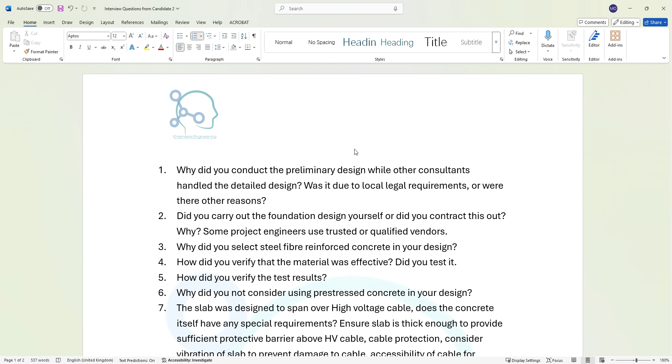Question 1: Why did you conduct the preliminary design while other consultants handled the detailed design? Was it due to local legal requirements, or were there other reasons? This question is asking why exactly did you perform that scope. Why didn't you do the whole scope? Why did you have to allocate some parts of the project to consultants?

Question 2: Did you carry out the foundation design yourself, or did you contract this out? Why?

It's important for you to note that some project engineers use trusted or qualified vendors. This is where we have examples of candidates acting more as project civil engineers or project mechanical engineers instead of technical engineers. Even though you are acting as a project civil engineer, you are still responsible for the project in terms of the technical know-how. So you need to know about the technical side of the project. Very important.

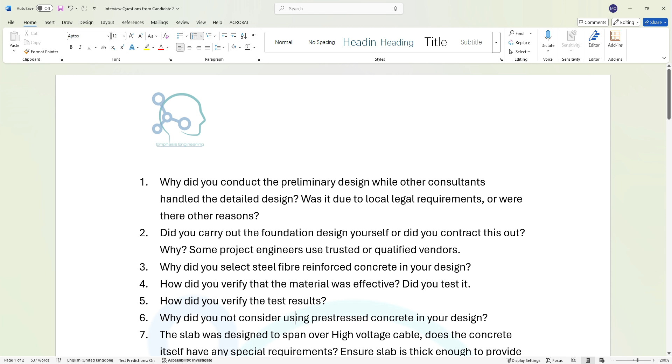Question 3: Why did you select steel fiber reinforced concrete in your design? Question 4: How did you verify that the material was effective? Did you test it? Question 5: How did you verify the test results?

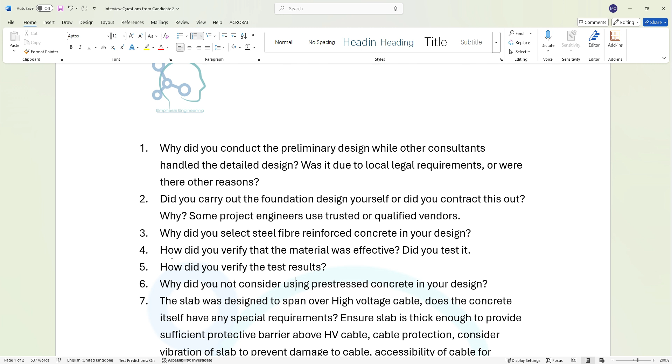Question 6: Why did you not consider using pre-stressed concrete in your design? It's not enough to tell us that you selected a particular component. You have to tell us why you did not select others. What was wrong with them?

Question 7, a specific question: the concrete slab was designed to span over high voltage cable. Does the concrete itself have any special requirements? What sort of characteristics would you expect for that concrete slab which was over a high voltage cable?

Things like ensuring that this concrete slab is thick enough to provide sufficient protective barrier above high voltage cable protection. Consider vibration that the concrete slab will be subjected to. You have to make sure that it is not subjected to vibration that will cause damage to the cable. Also, ensure that there is accessibility of the cable for inspection.

Question 8: Are there any specific additives selected? Did you use any additives for the concrete mix to improve the characteristics of the concrete?

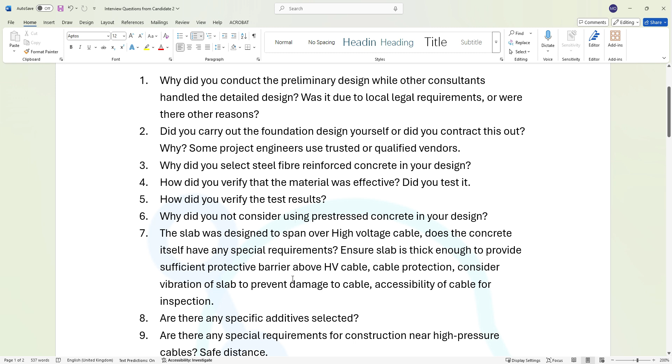Question 9: Are there any special requirements for construction near high pressure cables? For instance, you have to consider safe distance because of the risk of high pressure exposure.

Question 10: Why did you use prefabricated materials? Advantages of fabricating materials before sending them to the site are speed and efficiency, reduced on-site labor. It is also sustainable.

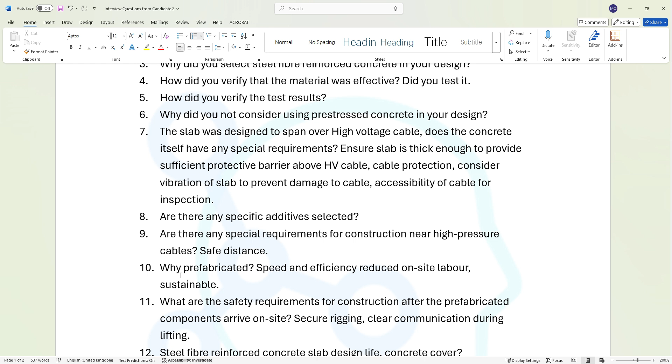Question 11: What are the safety requirements for construction after the prefabricated components arrive on site? Things to consider when bringing in these large prefabricated materials on site are secure rigging, clear communication during lifting operations. Question 12: Steel fiber reinforced concrete slab design life - talk about that and concrete cover.

Talk about design life and concrete cover. Question 13: Did you conduct any ground investigation works? Question 14: How can you verify the accuracy and correctness of the data provided by the ground investigation works?

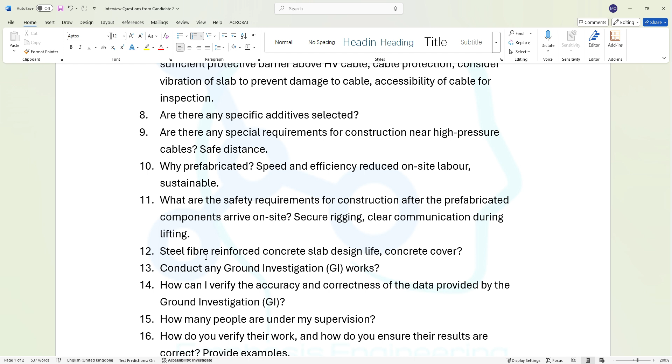Question 15: How many people are under your supervision? Question 16: How do you verify their work and how do you ensure that their results are correct? Provide examples.

As a team lead or a technical lead, it is not enough for you to assign tasks to team members. You have to ensure first that they are competent, they are proficient, and also ensure that you verify the accuracy, the method.

Question 17: What software did you use during project scheduling? Question 18: How do you determine what the critical path is? Question 19: What is the float of a project? For question 18, they're asking for the critical path of a project.

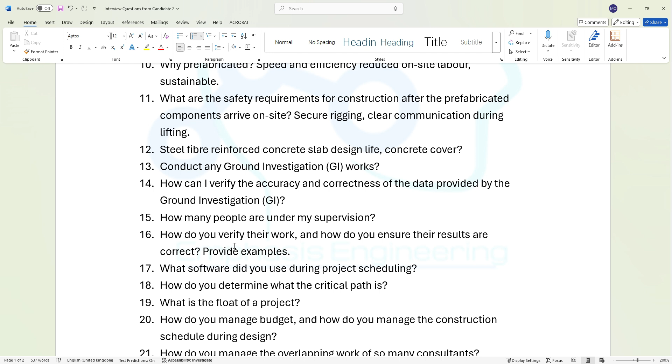Question 20: How do you manage budget and how do you manage the construction schedule during design? Question 21: How do you manage the overlapping work of so many consultants? Question 22.

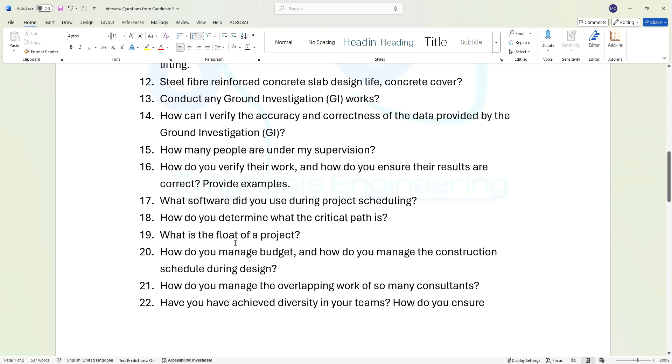Have you achieved diversity in your teams? How do you ensure inclusivity? So be rest assured you're going to be asked something on diversity and inclusion. That's question 22. So provide examples.

Under diversity, you're not expected to just talk about diversity in beliefs and appearance, but also diversity in knowledge and competence, especially for people moving from one industry to another. For instance, someone coming from the oil and gas industry and moving over to the nuclear industry probably has some safety culture that you can learn from. So you have to be inclusive.

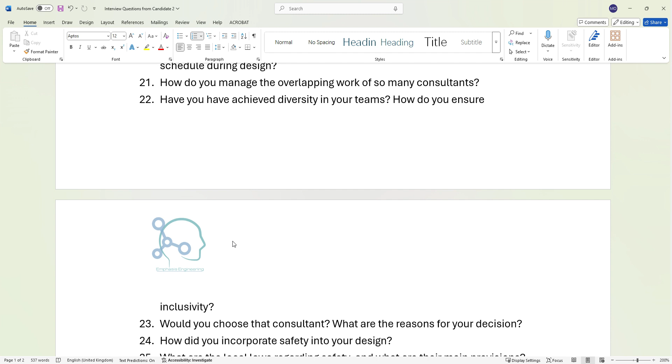Question 23. How would you choose a consultant, and what are the reasons for choosing a particular consultant?

Question 24. How did you incorporate safety into your design?

Question 25. What are the local laws regarding safety and what are their main provisions? Question 26. Does local law require clients to conduct safety walks at specific intervals?

Question 27. What types of contracts have you worked with? Question 28. What are the differences in the engineer's role under the FIDIC and the NEC contracts? So anything you mention in your report, be prepared to answer questions on them.

Number 29. Have you worked with both lump sum contracts and remeasure contracts? Question 30. What types of contracts does the consultant contracts you manage fall under? For 29, I believe it's reimbursable contracts, that's what the candidate was alluding to. So lump sum and reimbursable contracts.

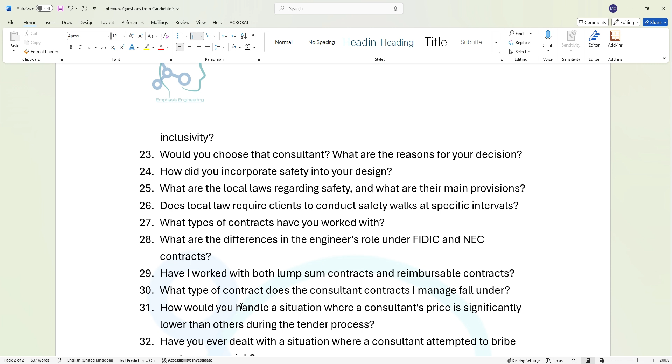So this is about selecting a vendor. What steps would you take to address that situation? Question 32. Have you ever dealt with a situation where a consultant attempted to bribe you to secure a job?

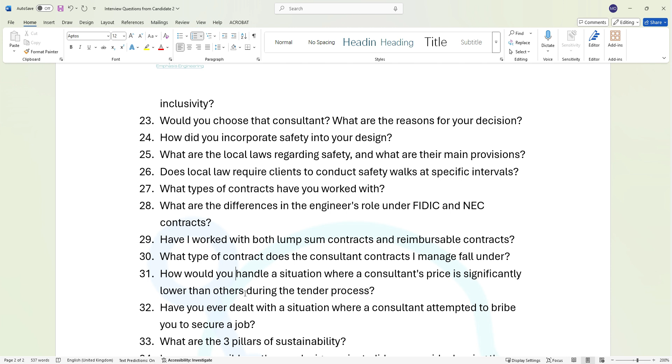Question 33. What are the 3 pillars of sustainability? Question 34.

In your accessible pathways design project, did you consider leaving them unchanged for environmental benefits? How did you balance and evaluate this? So there are certain times when you ask yourself, do we proceed with this project or do we disturb the environment? Is it worth it? And what measures are we going to take to ensure that the environment does not suffer?

Question 35. Did you estimate carbon emissions as part of your projects?

Question 36. In your CPD, you claimed 30 plus hours for career appraisal. Why do you believe that this qualifies as CPD?

This is where you have to carefully consider what items you put as continuing professional development. I would say that if you have a mentor who is chartered, or even someone who is not necessarily chartered but is your line manager or supervisor, and you have spoken to them about your plans to become a chartered engineer, you're expected to schedule progress meetings with them where they go through your reports. That is definitely considered a CPD activity if you've clearly identified that.